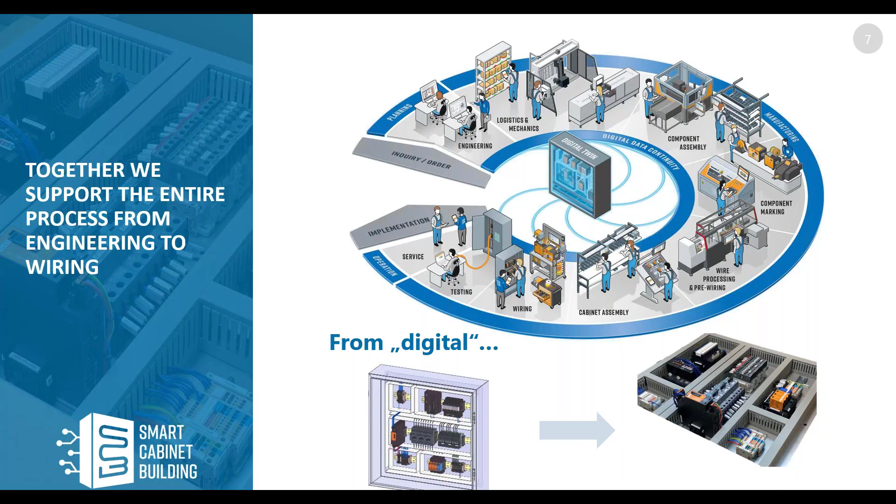Thank you, Christian. So let's talk about the digital twin and the way to get one. As Christian said, we have in the center the digital twin. From the digital twin, we can export all the data needed for these automated and semi-automated processes.

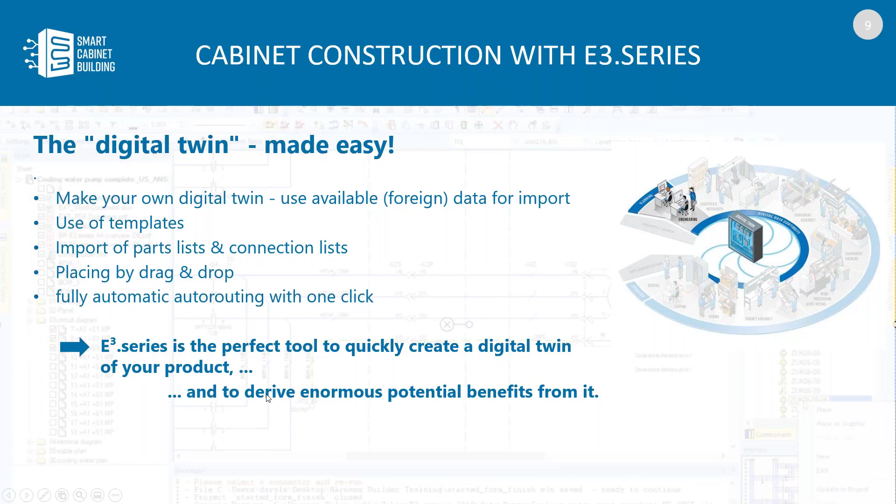But we need a digital twin, and if you are lucky, you get from your engineering department or from your customer a perfect digital twin designed with E3.series. If not, I can show you how to get a digital twin on your own based on a parts list and a connection list. Because if we have this digital twin, then we can derive enormous potential benefits.

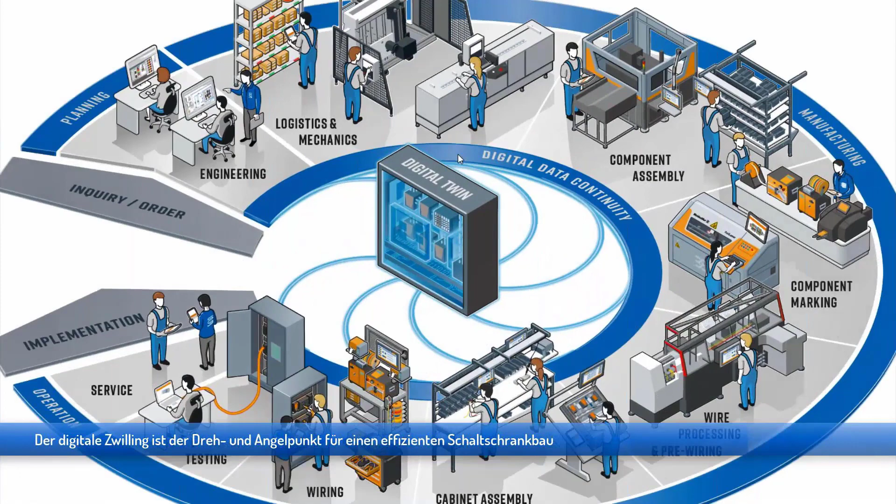So, short video. We can see in the middle, it's all about the digital twin. If you get a perfect digital twin, like in this case, it's ready. Maybe you already have one, then everything is fine.

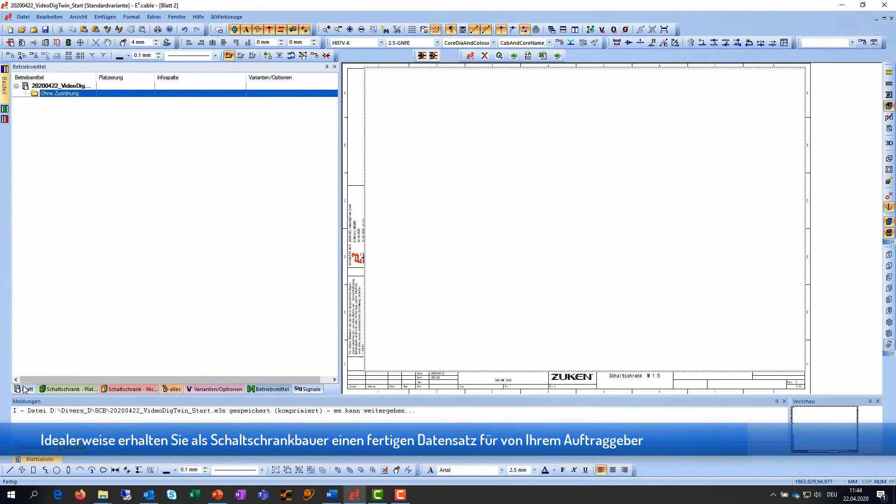If not, and this is now, I have an empty project and an empty sheet, so there's nothing in it, no devices, no wires, nothing. And now I can show you how to come to a digital twin very fast.

We can use, for example, some templates. In this case, I have a template with the mechanical part of the cabinet, so some rails and cable ducts and the housing. And we see that by importing this template, I have some devices and a graphical representation.

And now I import just a parts list.

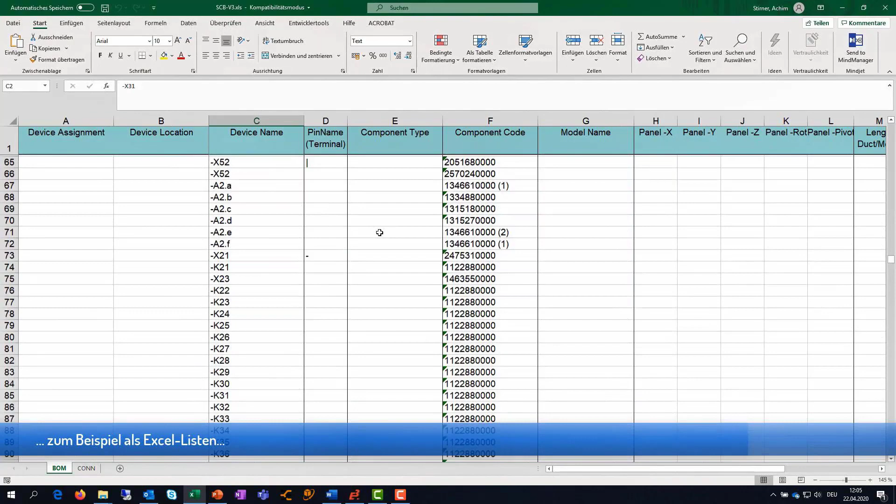It's enough if you have the device name and a component code or article name. In a second step, it would be nice if you have a connection list from the tool list. If there is also the wire color and the cross section, it's much better, but that's not a must.

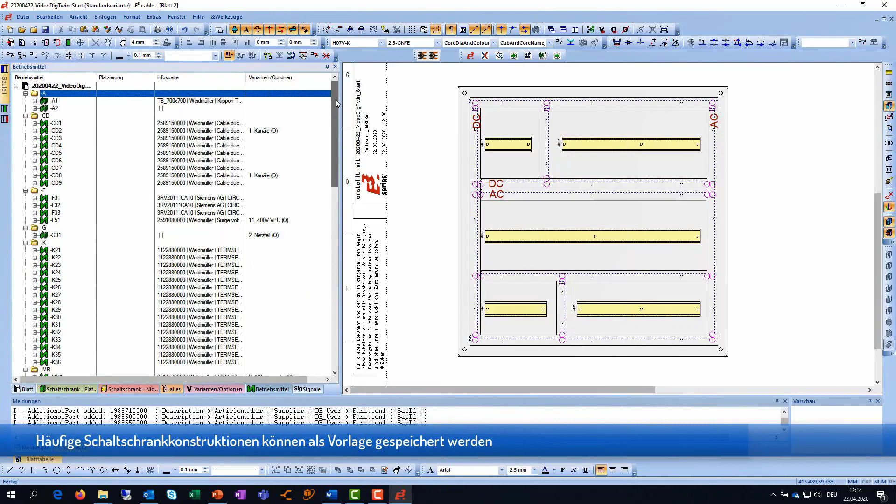So I have imported now this device list and the parts list, so I have more components in my tree, as well as some connection lists, and I can place them very fast.

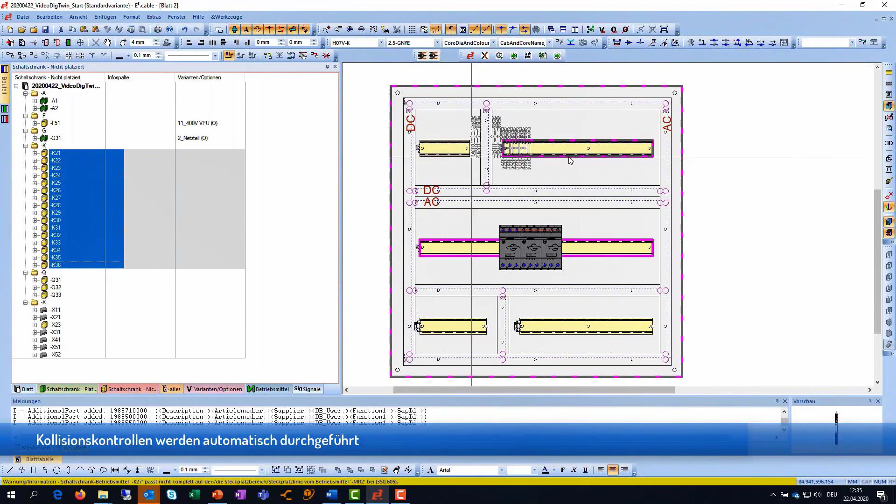With the E3 panel, you can see it's just by selecting the devices in this tree called panel unplaced. All my devices are in who I have in my parts list, but not placed in my cabinet. You can see if I place the terminals and these other devices, then the cabinet gets complete.

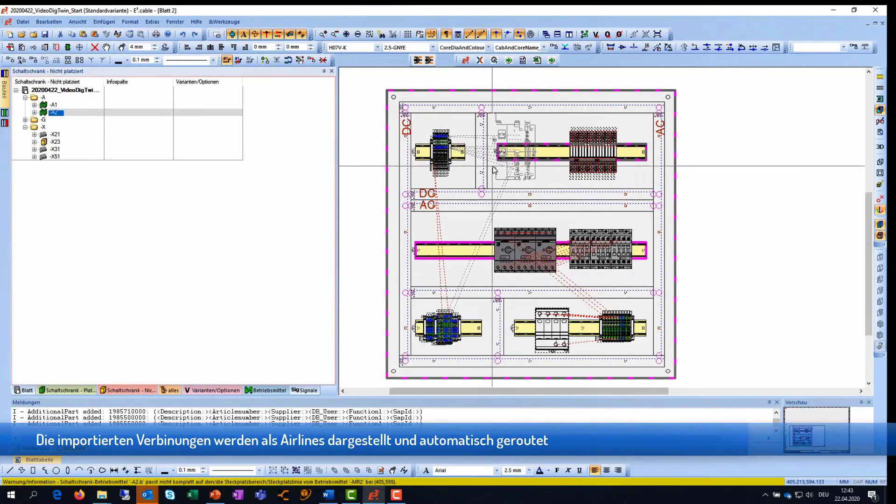And on the left side, my tree has to get empty. Then I know, okay, I have all devices placed. It's possible to place also all the components.

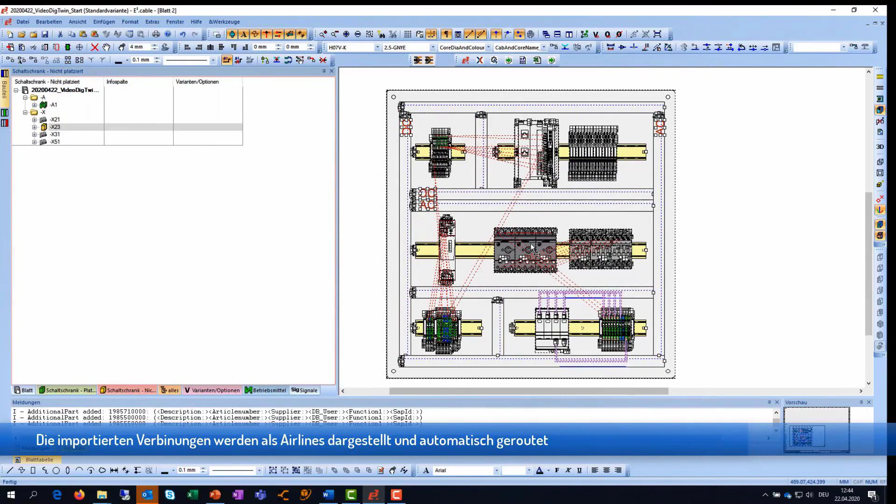The red dotted lines are the logical lines from our imported wire list, and now E3 can do the auto routing for you. If I select all the components and do the auto route, then the complete cabinet is routed, the cable fill duct degree is calculated, and now I have a perfect base to export our cutout information.

We can export data for labeling and marking. We can export the wires. We have source, destination, the length, the wire end marking, so the pin names and so on. So we have all the data.

We don't need any schematics. It's enough to have the parts list and the wire list and place them in E3 panel.

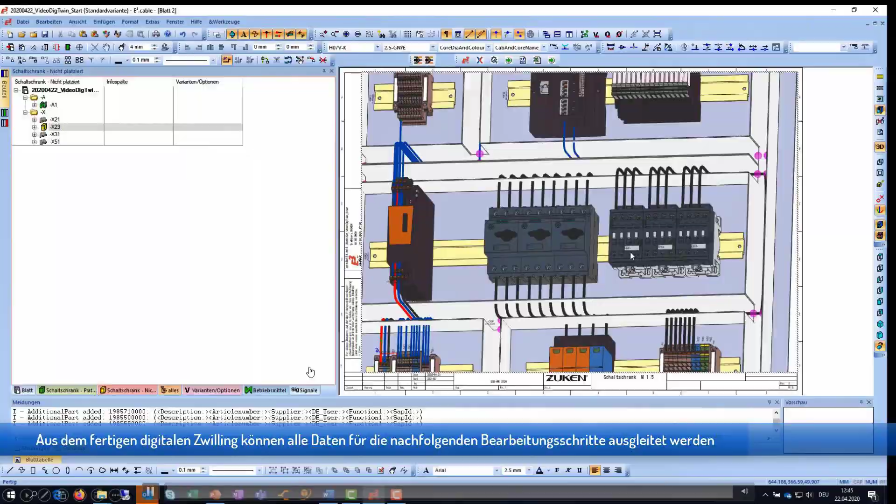And now this is a good base to export all the other data you have in your production. Maybe you have all of them. Oh, sorry.

Next sheet. So it's just from the engineering to create, to get or to create, like I showed, the digital twin. And then from the digital twin, you can export to various automated and semi-automated production machines, whatever you have.

In a perfect way to the machines of the partners of the Smart Cabinet Building Initiative, but there are some more exports to various other machines around the cabinet assembly and cabinet production.

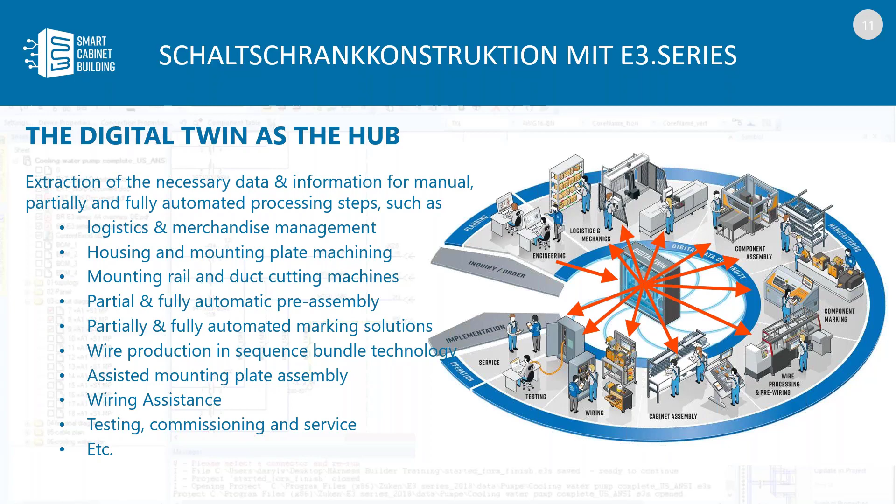And with this, I want to hand over back to Christian.

Thanks, Achim, for showing us the digital world and how we can easily get to all the relevant information inside the digital twin. The next process step I want to have a more detailed analysis is the process step of logistics and component assembly.

There we want to present two different kinds of solutions. First of all, our solution for automated assembly, and after that, Timo Tessin from Armbruster Engineering will give you some insights regarding an assisted terminal rail assembly solution.

Why are we showing both solutions? Because from our point of view, especially this combination of a robot for the high running components and an assisted workplace for the not so common components is a very good way to meet the required variety of variants in an economical way, which really makes sense in the end.

First of all, I want to show you in more detail the assembly robot, and therefore I would like to show you another video.

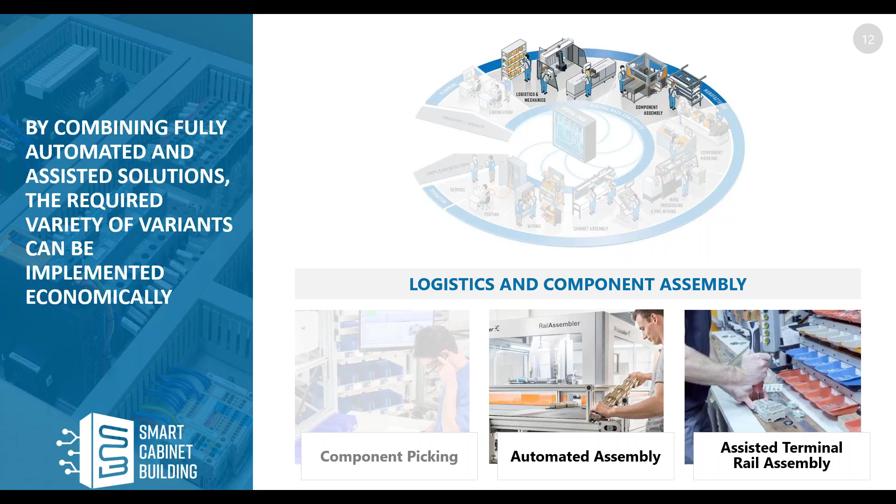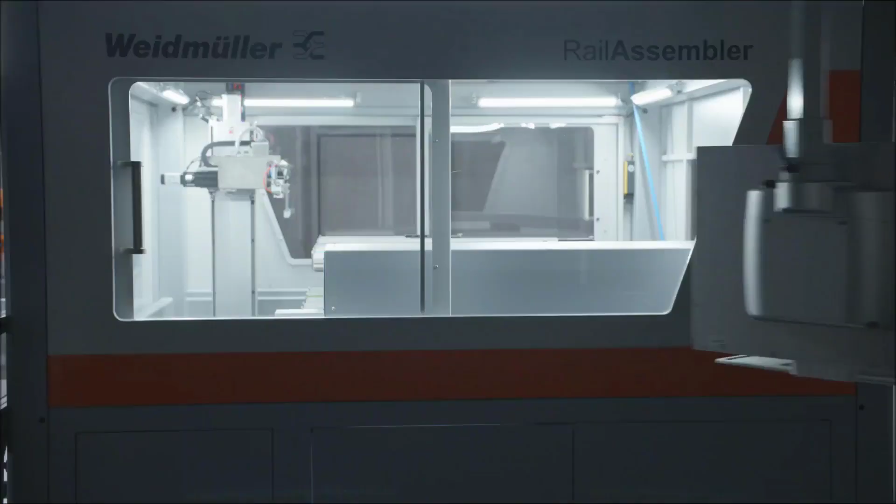Inside this video, we can see now our Klippon automated RailAssembler, the answer of Weidmuller for the task of having an automated assembly of terminals on rail.

The machine has overall 40 magazines for different terminals, and these magazines have a very universal design, which is also optimized regarding some handling points.

You could see in this video that for sure they are very easy, but based on this simplicity, we have really a universal solution in the end.

During the filling process, we have several booking steps to have in each process step the right transparency. The machine is steered and controlled by the information of the Weidmuller configurator.

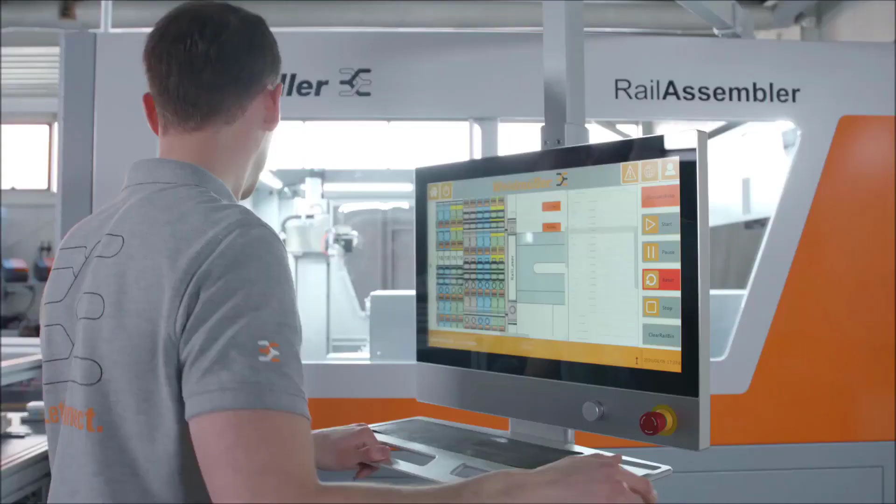And this Weidmuller configurator is also an automated interface to Zuken E3. We have 18 magazine places for pre-cut DIN rails.

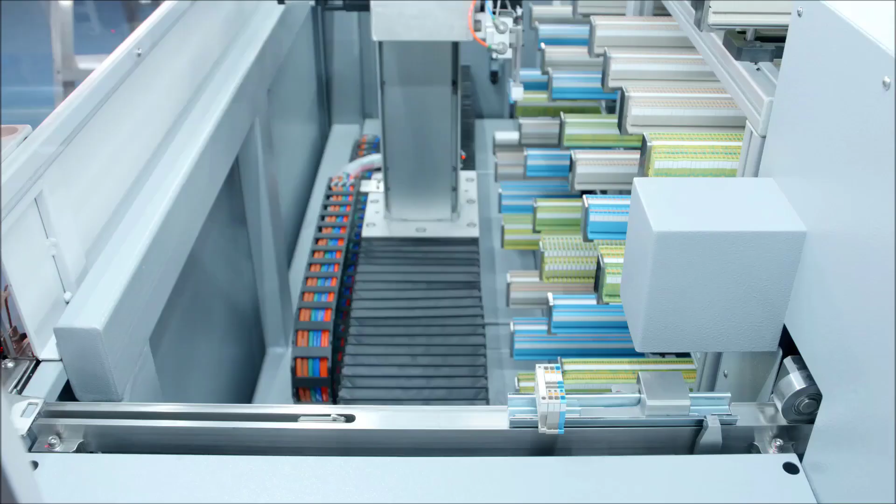Another really advantage of our solution is that we have a special kind of gripper, which consists of several slices, and based on the slices, we can even handle more complex contours of terminals as well.

You can see in the video that we are using terminals that already have blank markers on them. Our Klippon Connect A-Series is a DL version, because from our point of view the best combination is having the rail assembler for the assembly of components and later using a rail laser for the fully automated marking.

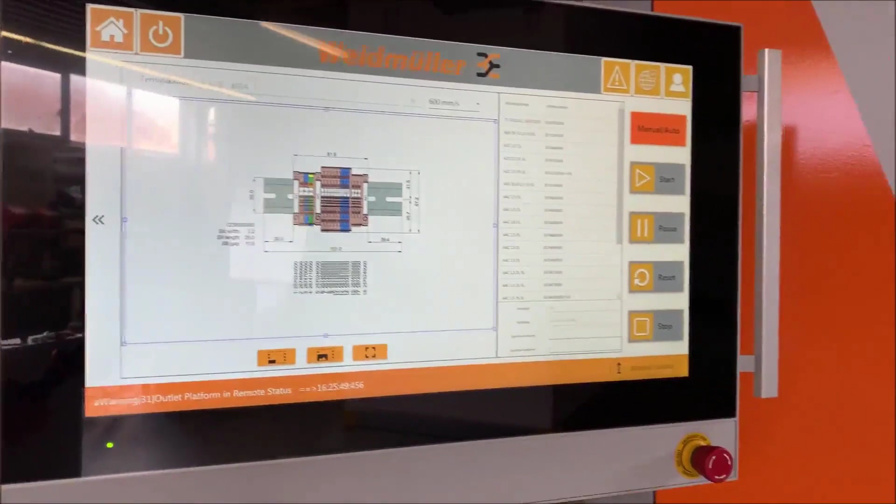But we don't want to show you only a nice image video. We want to show that this machine is really operating day by day. So we took a video yesterday afternoon with a mobile phone, no professional video.

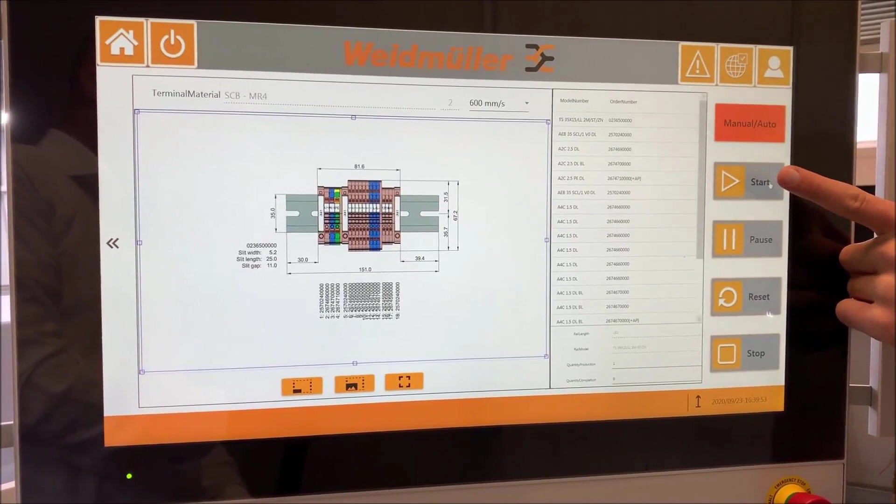You saw on the screen of the machine that we are producing exactly this DIN rail which Achim designed at the beginning. We saw the 40 magazines where we put on the right components, and after that we just press the start button. Then the machine starts the production process, terminal by terminal assembled on the rail.

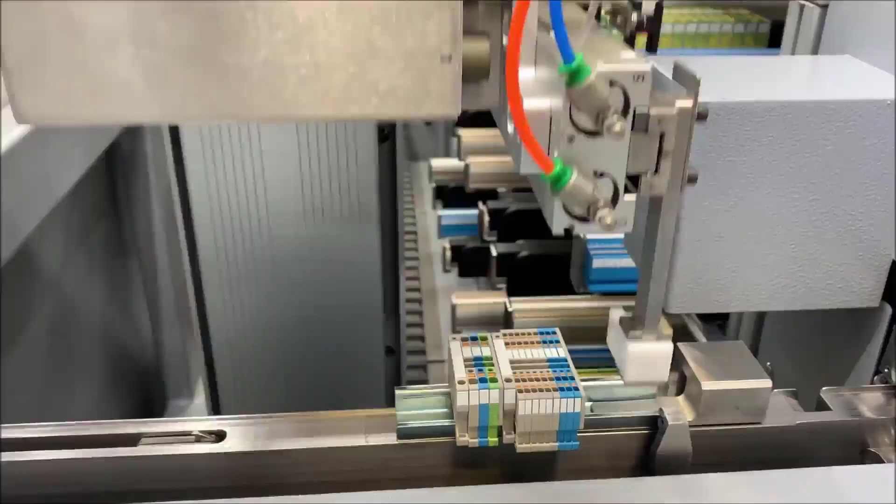Again, all the required information comes without any manual interaction directly out of the digital twin that we designed at the beginning of our process step. The robot puts all the components on the rail. We are nearly at the final stage, and then the terminal rail is put out of the machine. That was one DIN rail.

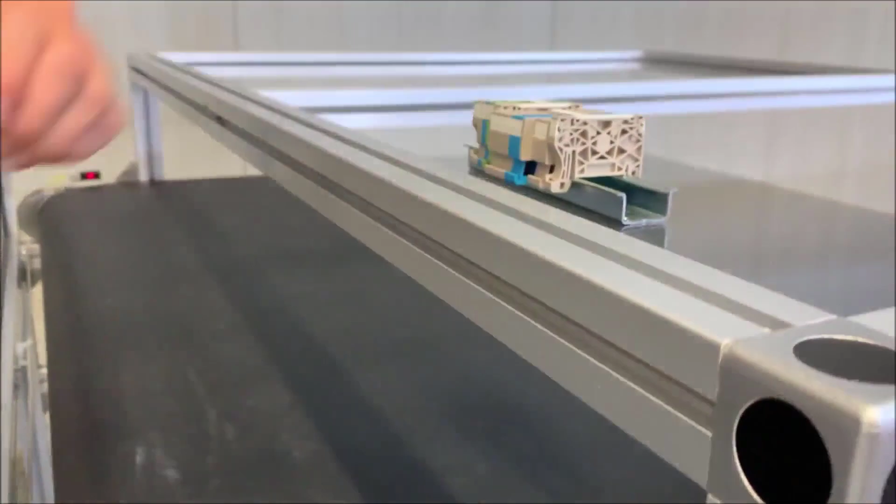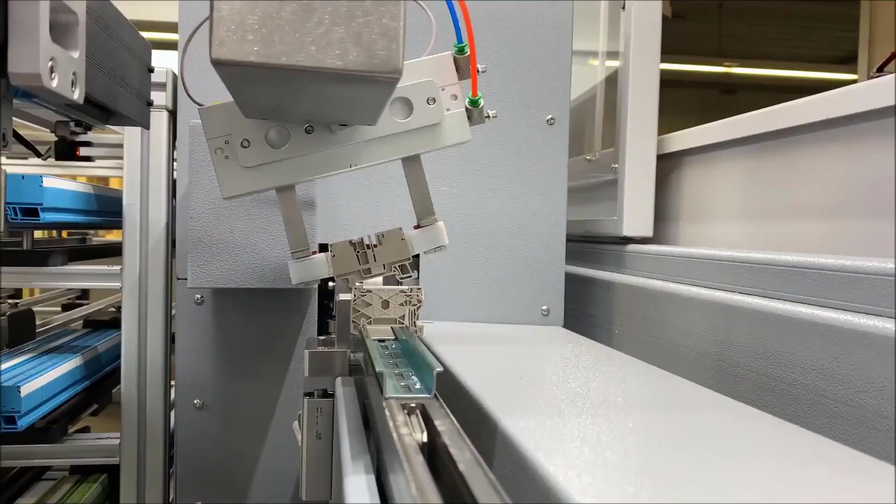I want to show you a second example, also from the digital twin we designed at the beginning. In this DIN rail, which you saw on the screen, we have a special setup where only the robot puts the high runner components on the rail. You can see that there's a huge gap on the rail at the beginning. In that area are special components that we will later place with the Armbruster solutions - for example, components that are not so common in use, or components that can't be handled by a robot, such as ones that have to be screwed onto a DIN rail.

Honestly, this combination makes sense from our point of view, and is a good answer to have a smart, robust and economical solution to meet the required variety of variants. In the video you can also see this special kind of gripper with several slices, so we have really robust handling of the different terminals on the rail. And now we put the rail out again.

And now we will come to the process step of assisted assembly, and therefore I would like to hand over again to Timo Tessin from Armbruster Engineering. Thank you very much, Christian.

Now we will show the assisted terminal rail assembly with ELAM, our software. So practically it's 3 parts. We have the component assembly that we support with our ELAM software via projected working instructions, meaning we show the positions of the terminals on the workplace.

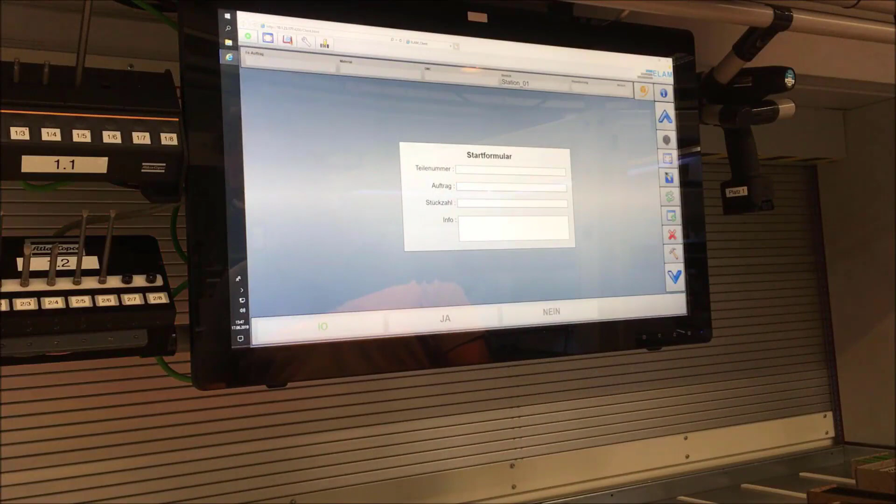Every working instruction you see here is dynamically generated, so nothing is pre-built. Everything comes from the export data that we are receiving. Here we can see that the work instruction is generated and shows where you have to assemble the rail. We also support with automatic screwdrivers, so we can give the worker the exact amount of screws he has to assemble.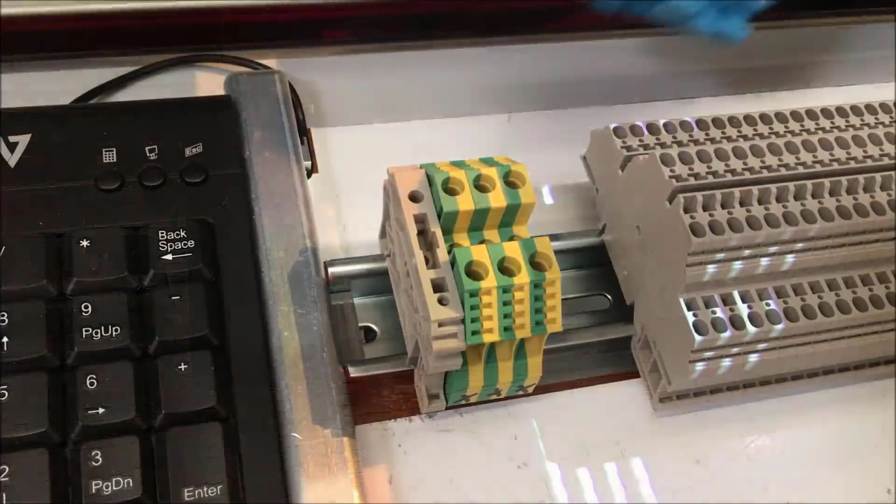The worker will assemble the complete rail here with all the missing parts that were not yet assembled. The next part is the markers. Here we also show the worker where he has to put the markers and that he has to print them. You can see by the projected working instruction that the worker sees exactly where he has to put the markers.

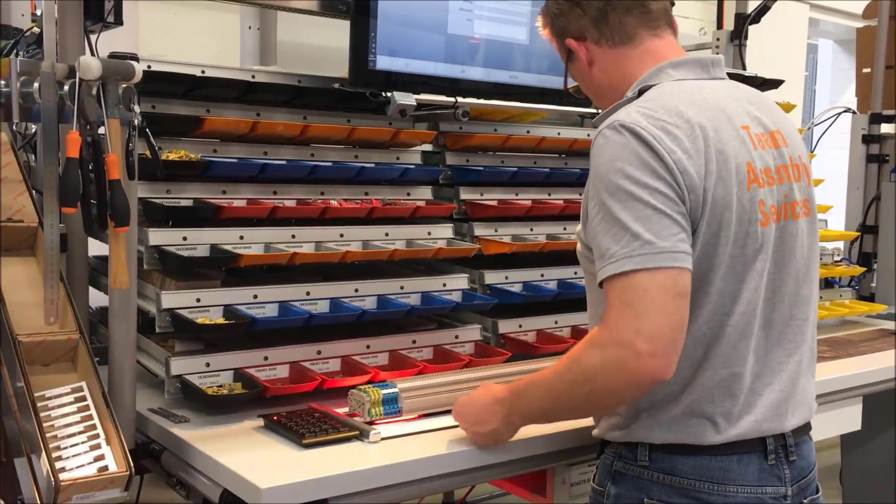And in the next and last step are the accessories. Here the system is supported by the pick-to-light system. He can pick the connectors from the pick-to-light system, and also has to screw them again.

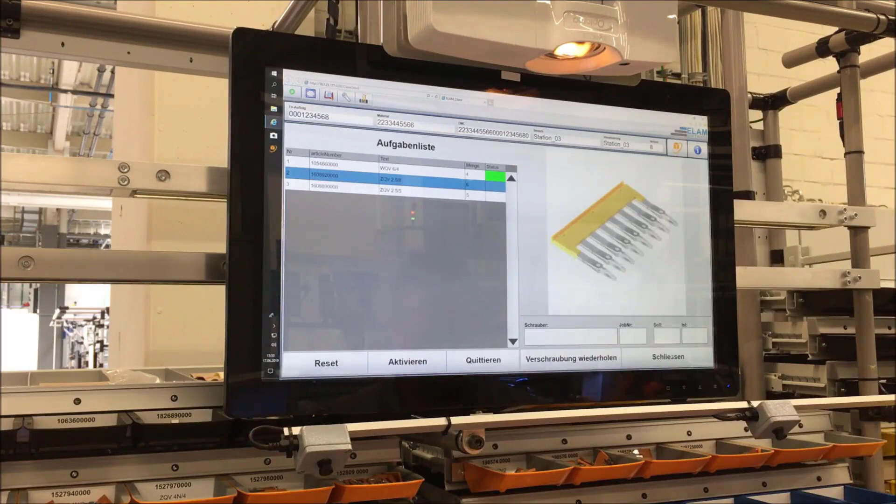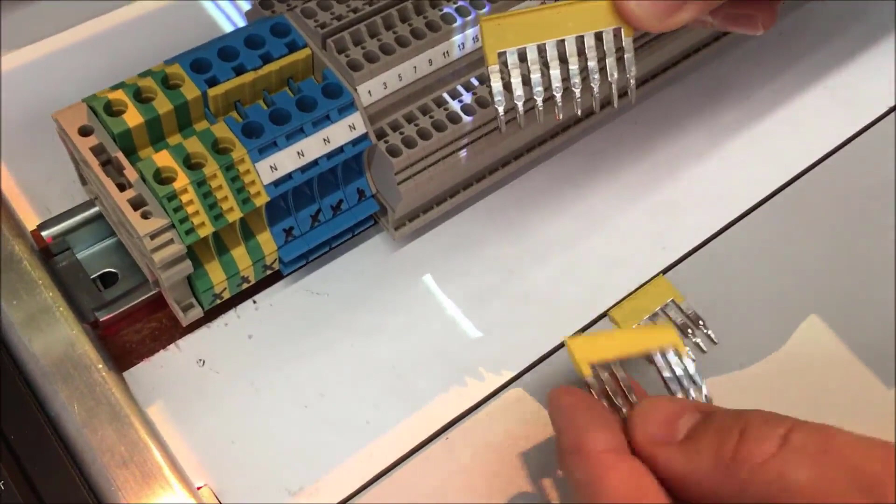Everything is documented here. And we also show the worker via the projection how the connectors should look like. You can see it here. This one would not fit, but this one would fit. So you know how the connector has to look for your assembly.

And at last the documentation, where we take a picture of the assembled rail, terminal rail. Yeah, that's about that.

We also have our small video from the last fair in Czech, I think that was, that we can watch here. So this is the same as before, but just compressed into one small case. But it's practically the same.

We are seeing the dynamically generated work instructions. We have our pick-by-light system that's supporting the worker, and we are also projecting the work instructions right on the workplace, also supported by the electronic screwdrivers. And step by step, we can go through the assembly.

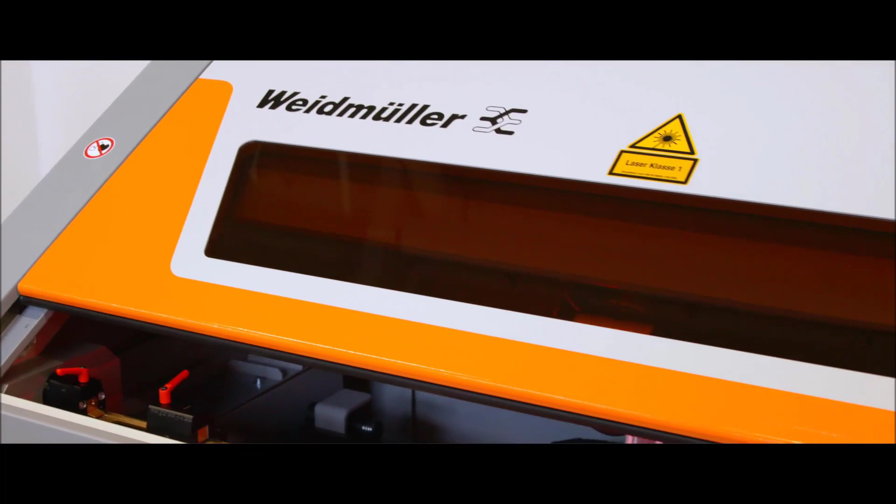So also here at the beginning, I'd like to highlight the rail laser itself, a machine which can handle DIN rails with a length of 100 up to 1,200 millimeters and 15 kilograms. We presented this solution during the SPS fair roughly one year ago, and we implemented such machines also during September last year in our own production.

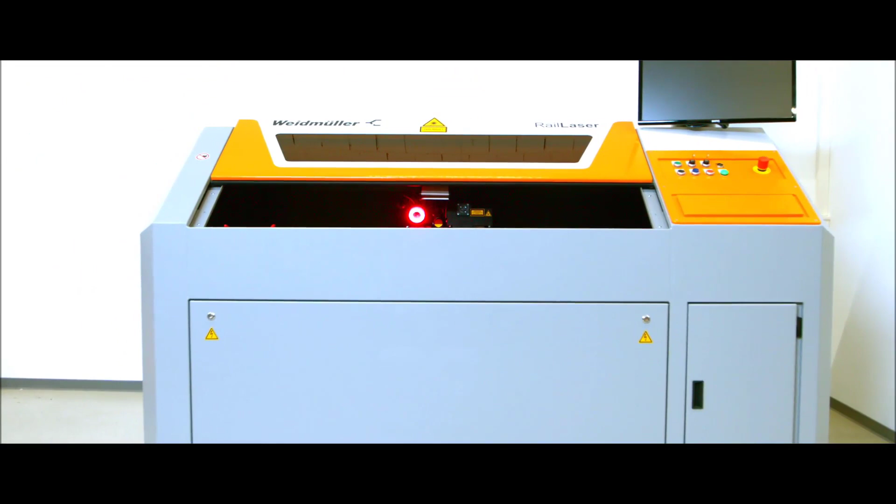Because based on this solution, you can really have huge time efficiency increases up to 90%, depending on the length and complexity of the DIN rail.

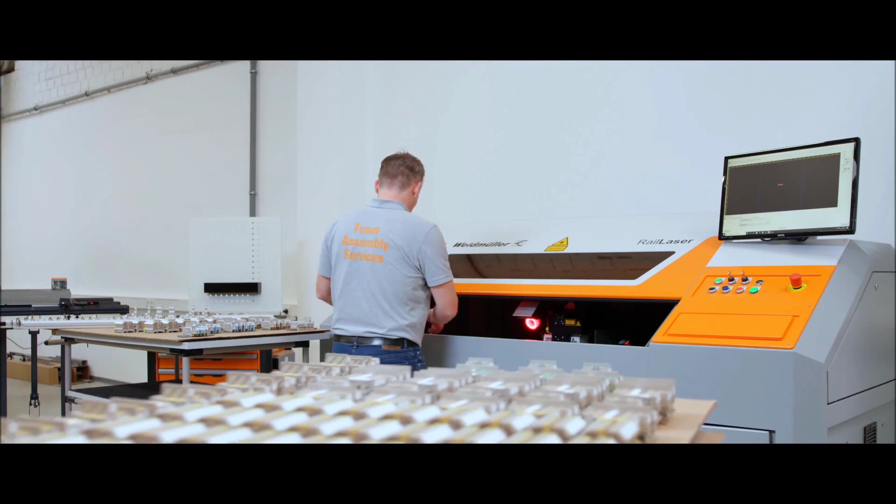So again, everything is steered and controlled by information from the Weidmüller configurator, which has, as a short reminder, an interface to Zuken E3, and we are using exactly the information that Achim designed at the beginning. If we use the so-called A-series DL with blank markers on it, the operator only has to put the rail inside and press the start button.

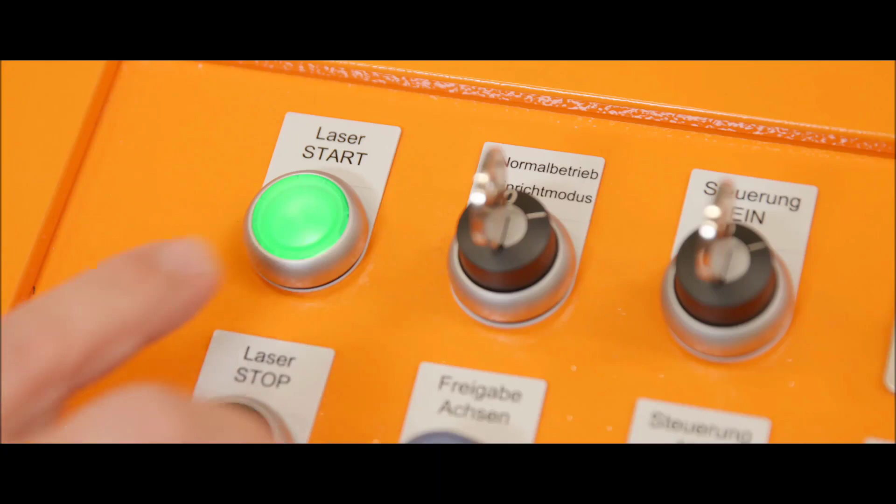You see here on the screen that this solution is very universal and flexible. So our idea in this use case is the high-runner components are assembled with the rail assembler, the other components with the assisted workplace, and then the fully equipped DIN rail goes in the end into the rail laser, because the rail laser can also take care of components with a very complex contour, for example, or components that have to be screwed onto the DIN rail.

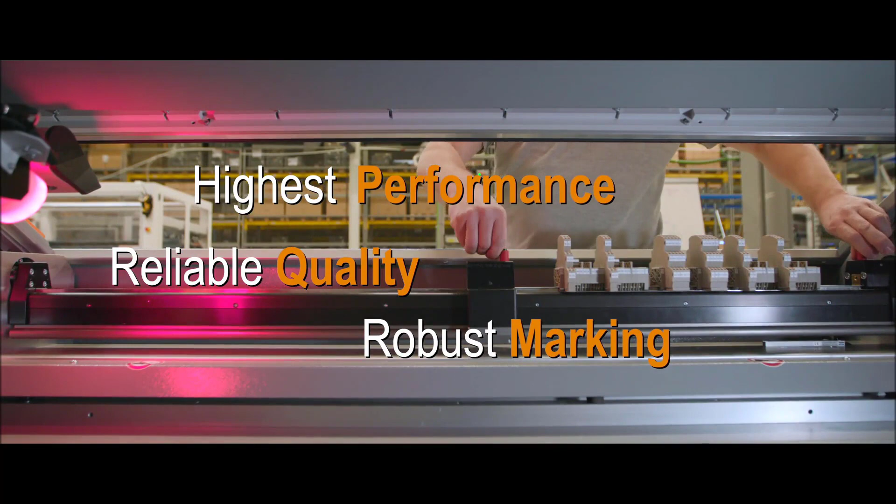A unique aspect is the image processing inside our machine, but I'll give you more details on that later. So also for the rail laser, we showed that this machine works nicely, but also for this machine we want to show you that it's real life. We took some videos with our mobile yesterday to show you that it's really working.

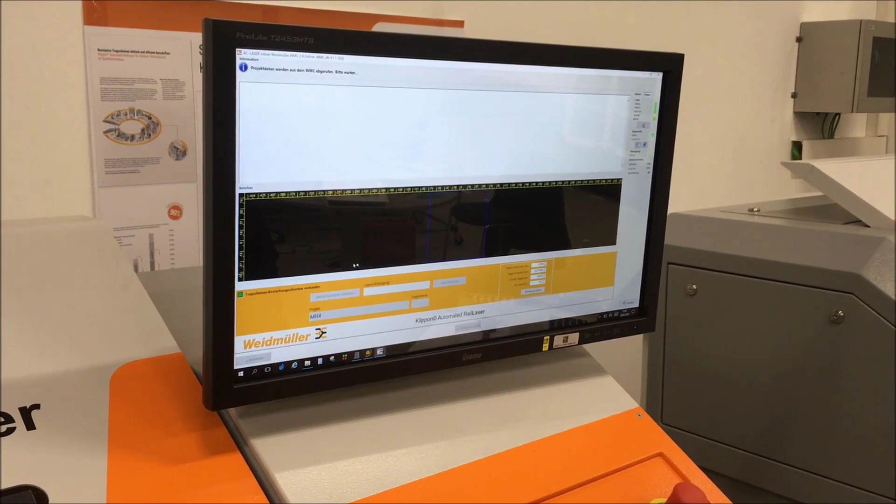So again, we are using the file from the Weidmüller configurator, reloading the file. You might remember this DIN rail from the beginning where Achim showed us this DIN rail already. And now at the rail laser, the operator only has to put the DIN rail inside. For example, these cross connectors were also assembled by a projection at the assisted workplace.

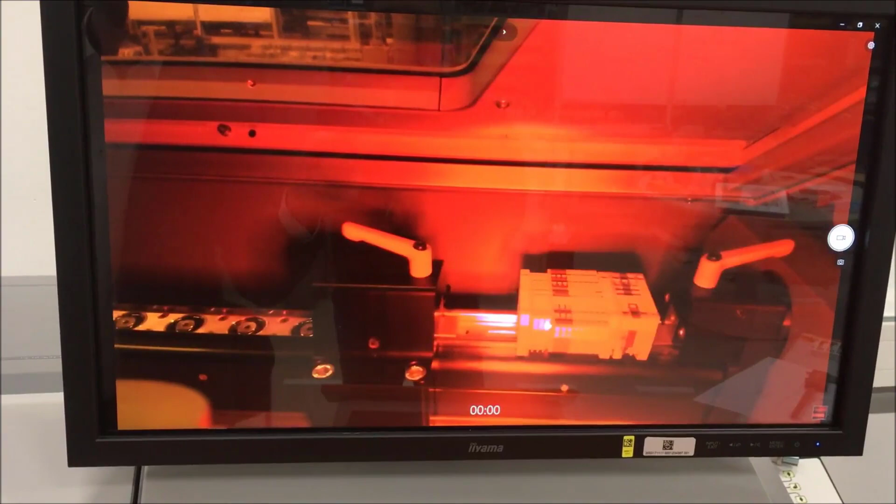Press the start button, and then the image processing takes care of each marker. So we are checking from several sides the position of each marker on the terminal, comparing this position with the position in the digital twin, and we do fully automated adjustment to make sure that we mark directly in the middle of each marker.

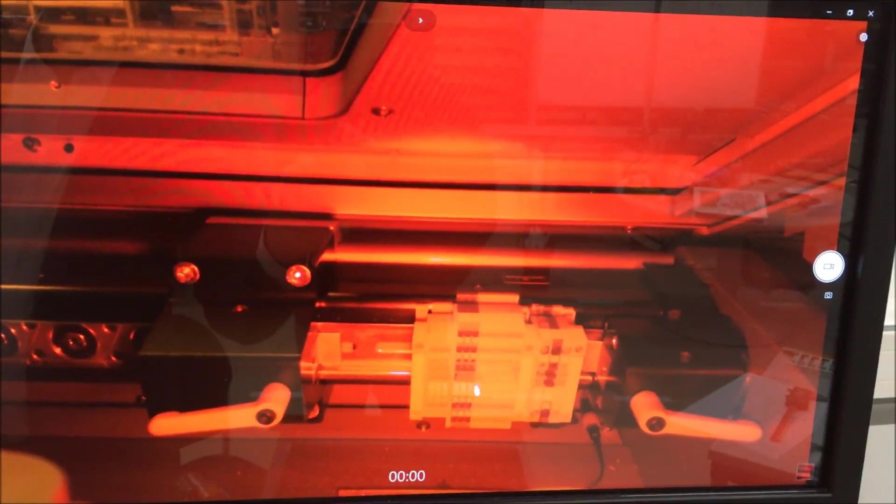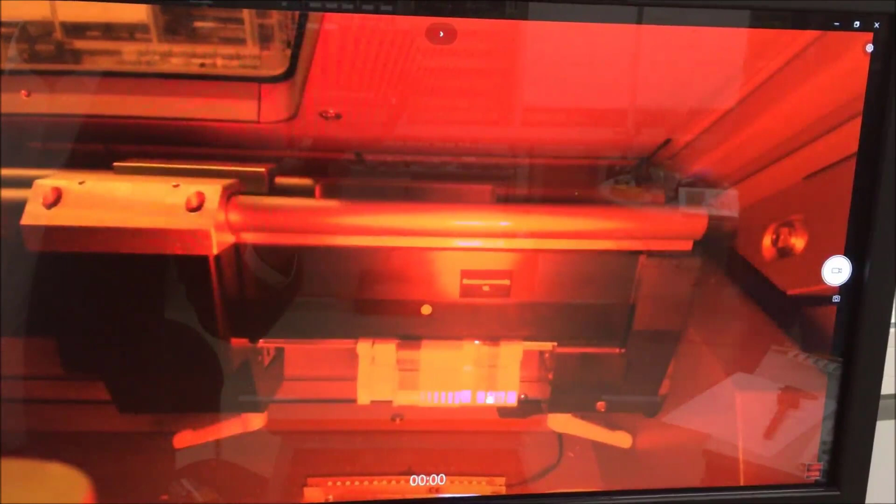And you can see in the video that it's a really high-speed marking process, high accuracy, high speed, and also a very good result in the end with the final marked DIN rail. So just the final side, and then the machine will open and we can see the marking result.

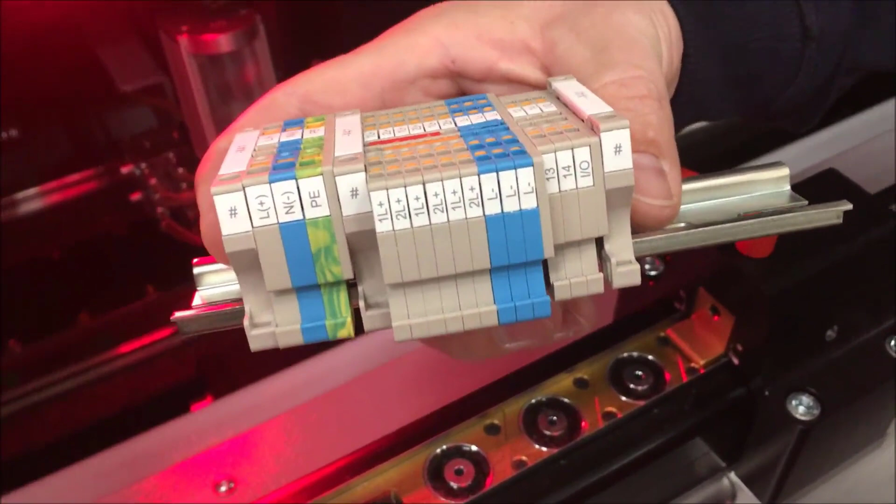We have also very good sharpness for these markers, this marking process, and based on our laser source, we can use our standard marking material, so no special markers are required. That was the first DIN rail.

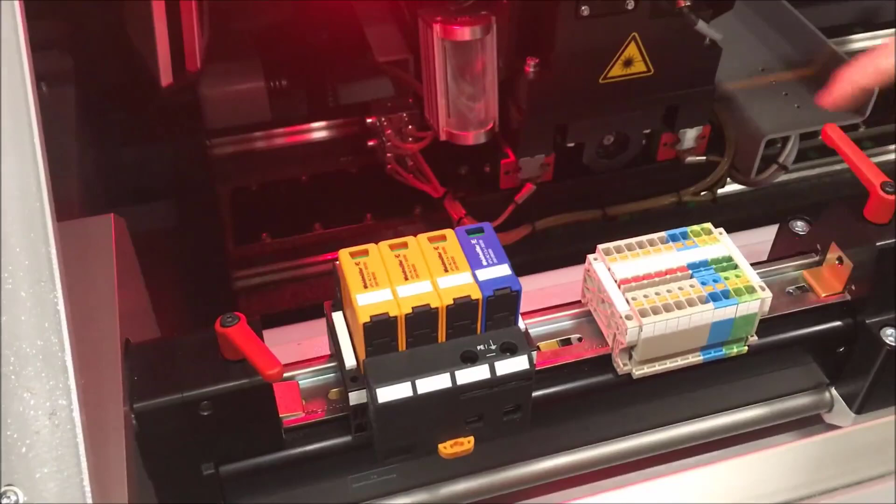We have also a second one. If you remember from the video, the rail assembler takes care of the terminals on the right-hand side. Over voltage protection comes from the assisted workplace, where we add this kind of component.

Also this DIN rail we just put inside the machine, we fix it, press the start button, scan the DIN rail from several sides again, and then the marking process takes place. You can see that we are able with our solutions to mark not only terminals, but also some bigger electrical components. DIN rail components are possible to be marked with our solution.

Here you can see the result. So also there we have all the markers marked as required. And after the marking process, for sure the wire processing follows, and therefore I would like to give the word to Tillmann Hoss from Komax.

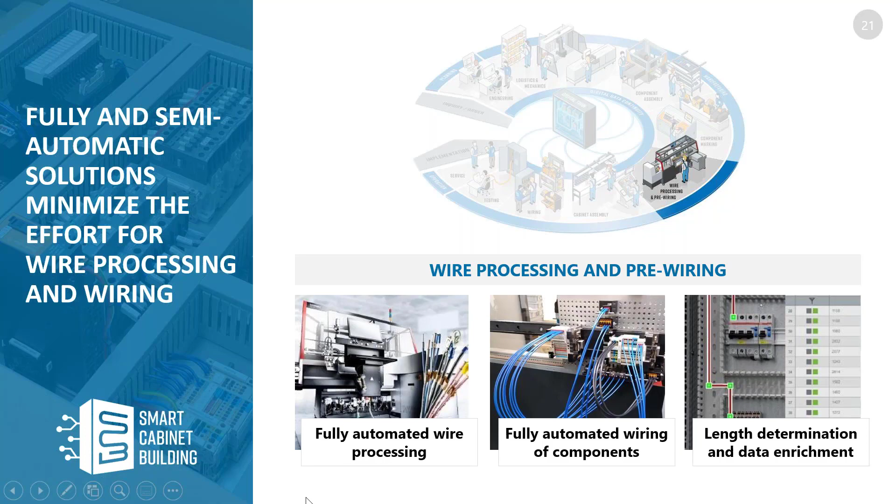A quick theoretical excursion in the beginning. Why is it so important to have one data source that you can use for all your process steps? This is very instructive. Often you see a manufacturing setup like this, so each process is in a sequential row. You have to hand over your work piece from step to step, and very often it's also done just by one person who is bound to this one project.

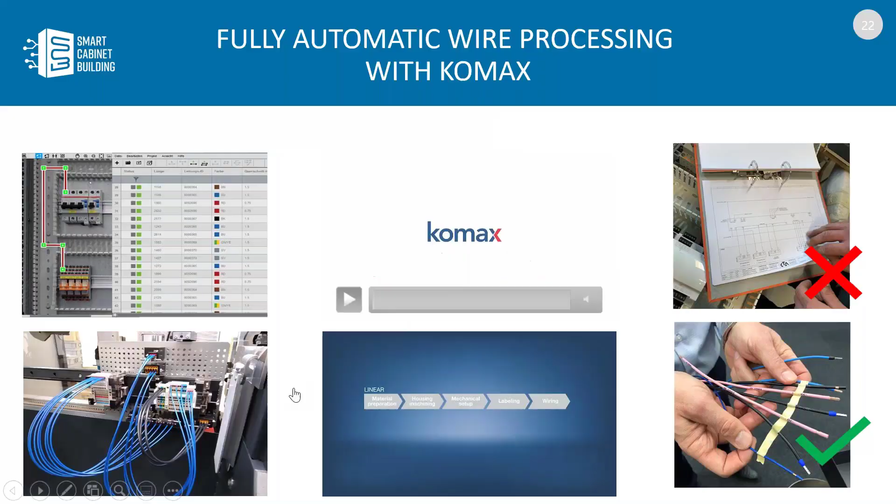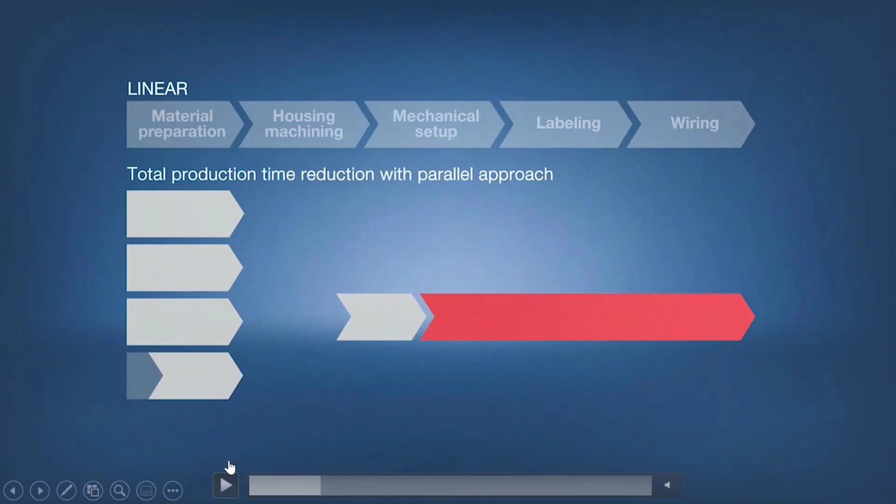Now you can optimize each process step, which will help you save time. But the big gain is when you start to execute those process steps in parallel, when you are able to break up your process chain into individual steps that can start simultaneously, because they are all drawing their information from one source of information.

And this then really gives you an advantage of up to a 65% reduction of lead time. So when all information is available, you can already assemble your terminal blocks, you can cut your wire ducts, you can start assembling all your components, and in parallel you produce the wire sets. The fully automatic production of wire sets saves you 50% time, even if you have to enrich your data.

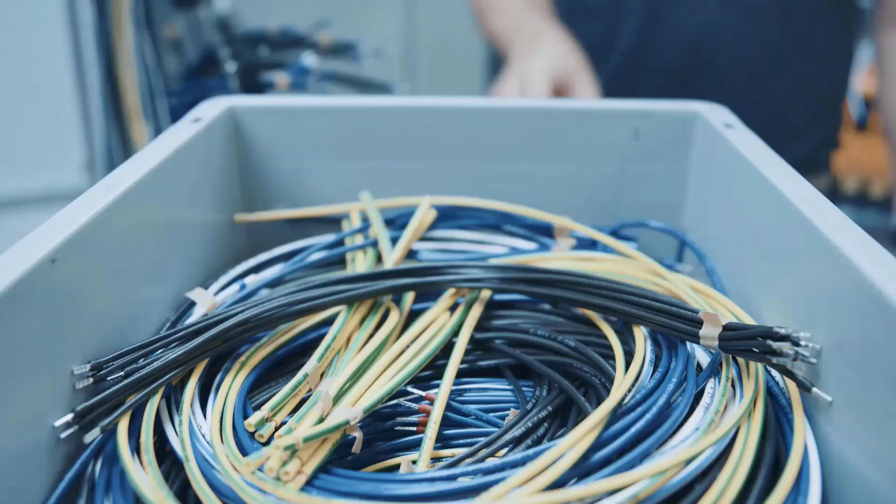And then when you get your wire sets nicely bundled by functional groups, for example, they're all marked with target and source information, so just a trained operator can easily wire up your harness, your control cabinet without making failures. This saves you up to 80% of wiring time. So that's something that everybody wants to have.

But the precondition is to have a machine readable connection list. In the ideal world, like Achim Stirner from Zuken showed, you make your engineering in 3D, you can derive all your data from there and export it very nicely to all the subsequent process steps. Very often we see that, unfortunately, this is not the case, because the engineering does not take care that all production relevant data really comes with the digital twin.

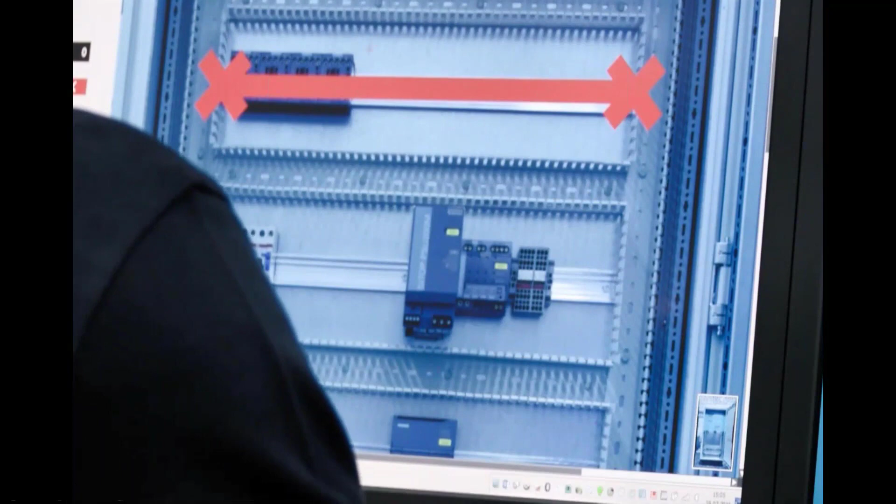So Komax has created here a small tool where you can take a photo of your control cabinet. This control cabinet is calibrated, so you have the dimensions. And then you pick your connections from your connection list, and you can quickly draw the connection on your PC screen. The skilled worker is very, very quick on this, and you also have some rules behind it.

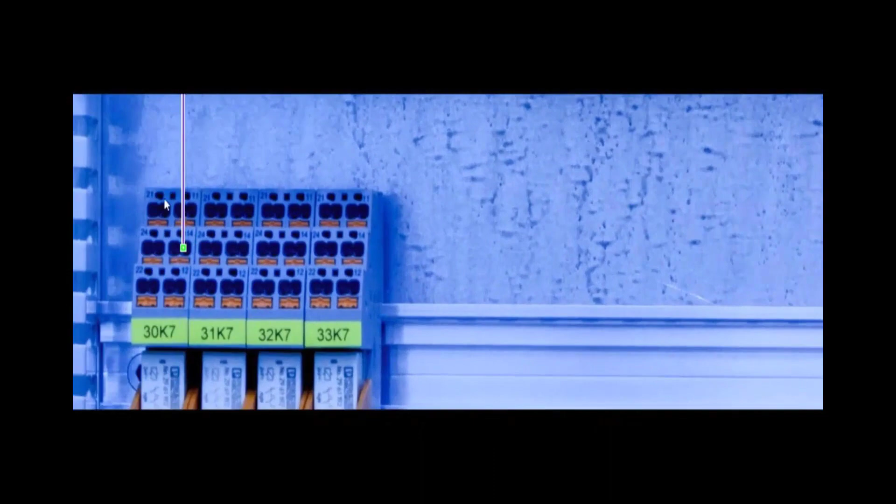For example, only the signal lines go on the left side and the power lines go on the right side. And you see here in this connection list that the length has been added. You can also add missing data, like the connection type - is it a ferrule or a ring lug?

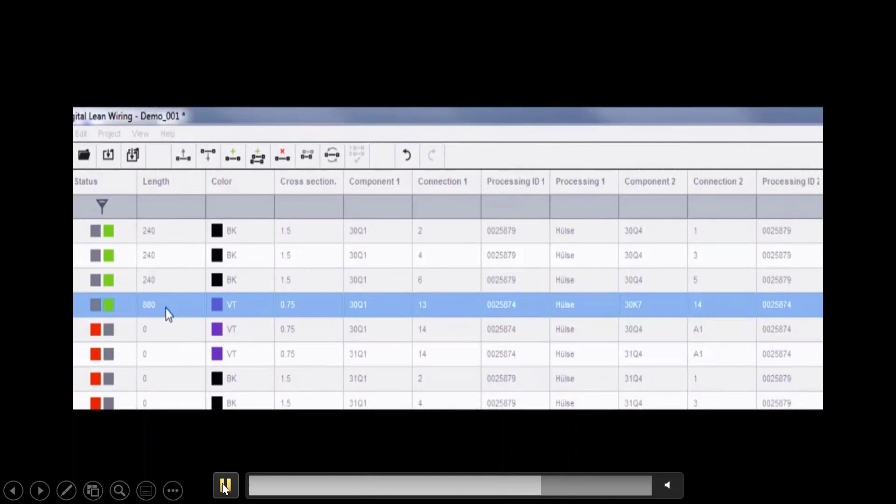Or you can add the color and dimension of the wire, and you can treat batches of wire at the same time. So you can very quickly enrich your data and then be ready to send it to the machine, to the Zeta machine, and get it produced for you.

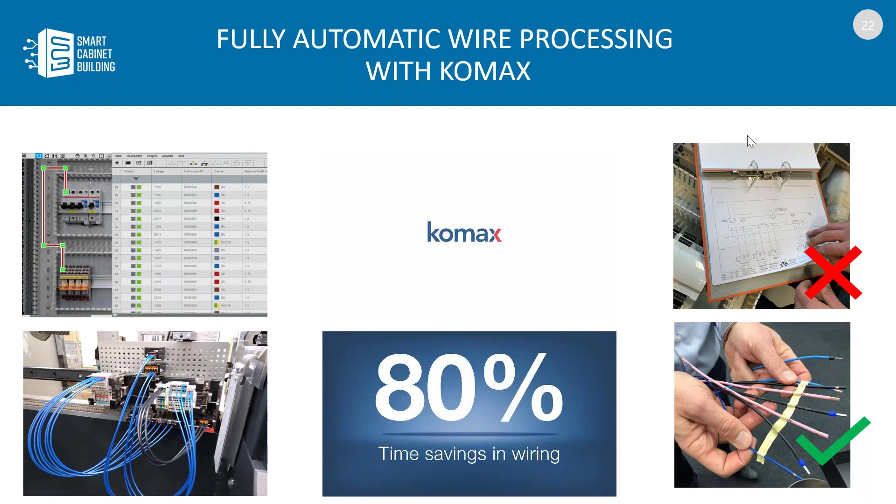It will give you the bundles in a way that's easiest to wire up your control cabinet. This is actually state of the art - many companies are doing this or moving towards it. In our use case, we want to demonstrate more, and for this I'll start a video.

Quick remark - we have seen that the engineering was done in 3D. From there we could configure the terminal rails. The terminal rails were produced fully automatic on the rail assembler, marked on the laser marker, and now we get them on the machine, where we can wire them up fully automatic.

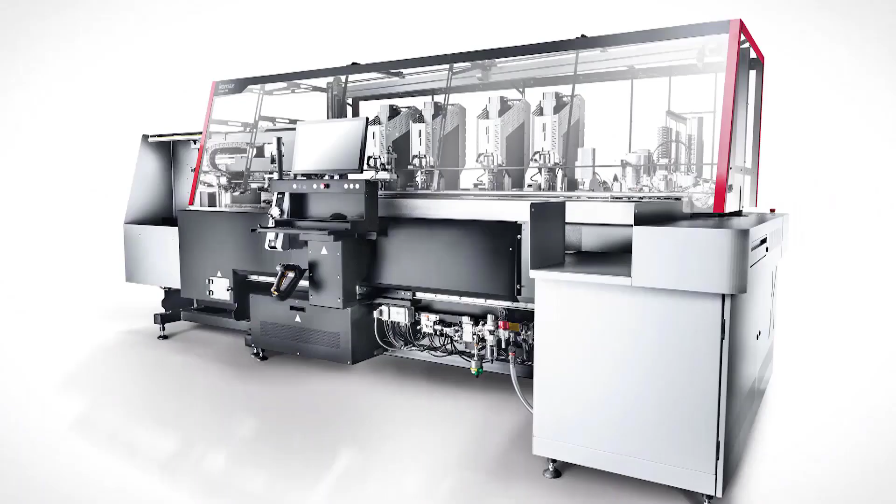Sorry, now my voice is back.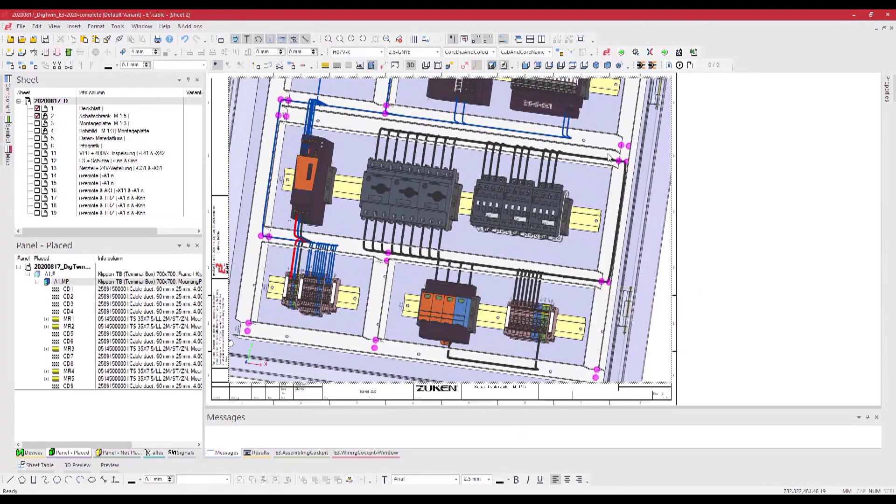As I mentioned, it is engineered in 3D. We get all the information for the terminal blocks and transfer the data to the machine, so there's no programming done on the machine. Here we have the wire processing - 36 different wires on the machine, cutting to length, printing target and source information on each wire.

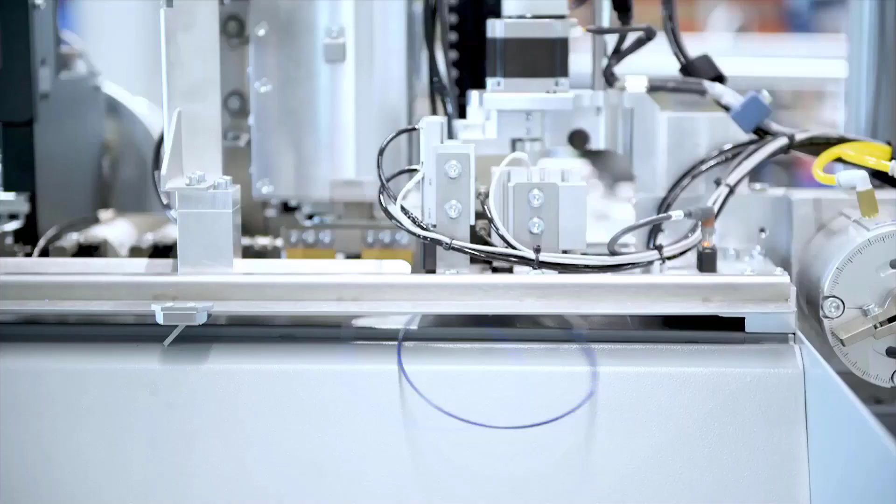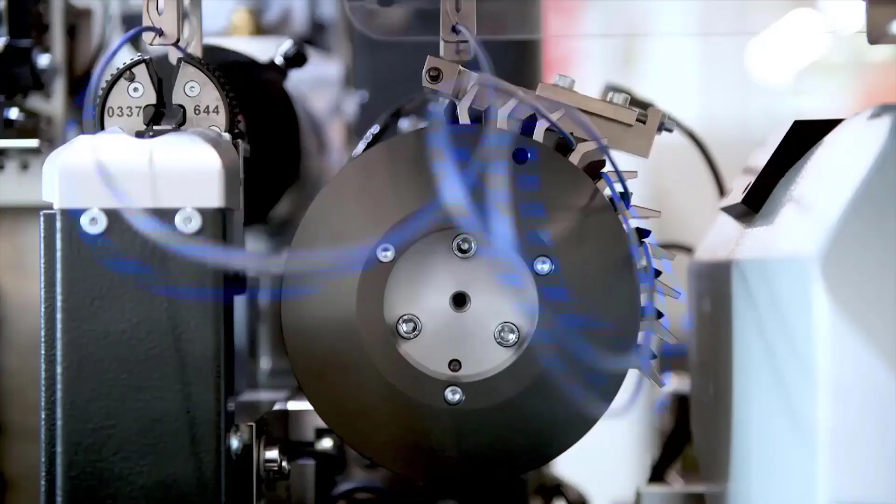Then we have on the machine different wire end processing possibilities. In this case we show the ferrules - we can apply different ferrule types on the machine, and here we can produce a mixed sequence.

Here it gets really interesting. That's the part where the wires are sorted in sequence, how we want to do the wiring up of the components.

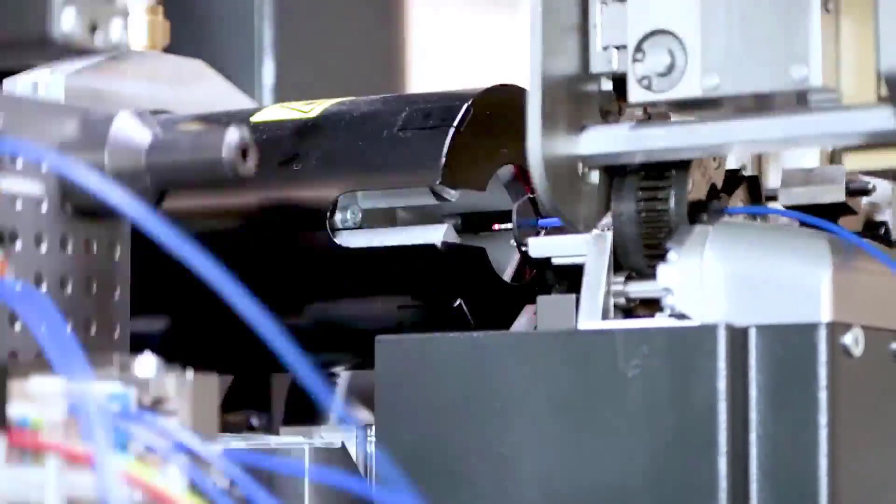The interface. I saw I was muted - I hope you could hear my last comments.

So, fully automatic wiring up of those components. And this is also possible for small lot sizes because there's no programming done on the machine.

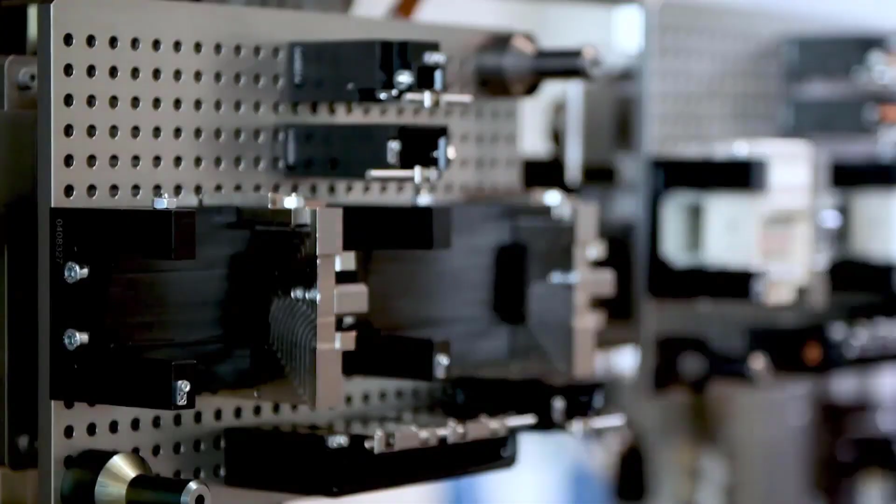This is, in our view, a very efficient way to take the next step in automation. Many people still hope for a robot that does it fully automatic directly on the panel, but we see there are a lot of hurdles to overcome. Maybe in the future it's possible, but here we show a way it can be done today.

And all those components that cannot be assembled or wired up on the machine can very easily be done on an assisted workplace, like we see from Armbruster, where you get software instructions on how to do the job.

Okay, this was the part of wire processing, and with this I would like to hand over to the final steps of control panel manufacturing.

So then I will continue with a small introduction for the next step - it's the assisted mounting plate assembly.

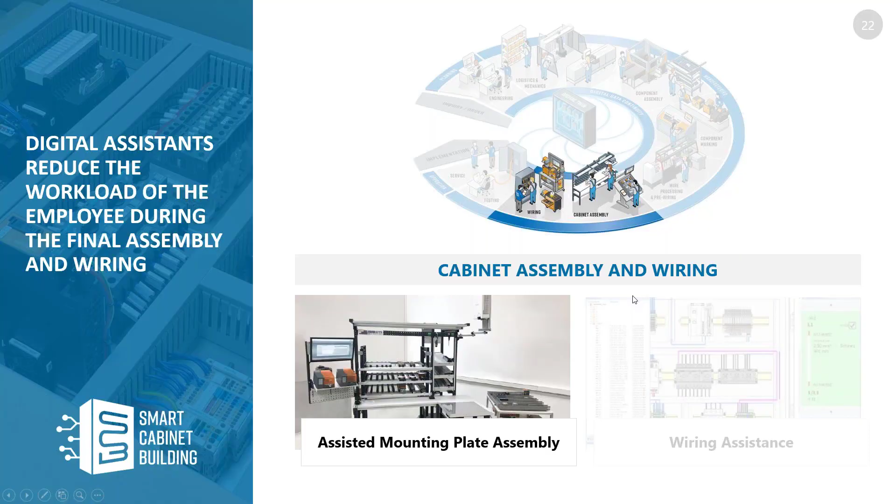So if we have our digital twin, it is possible to export the necessary data for the ELAM system to create the assisted information. We know all the components needed, and we also know the sequence in which they should be mounted on each other. So this is also only one click for the user - I can show this in a small video.

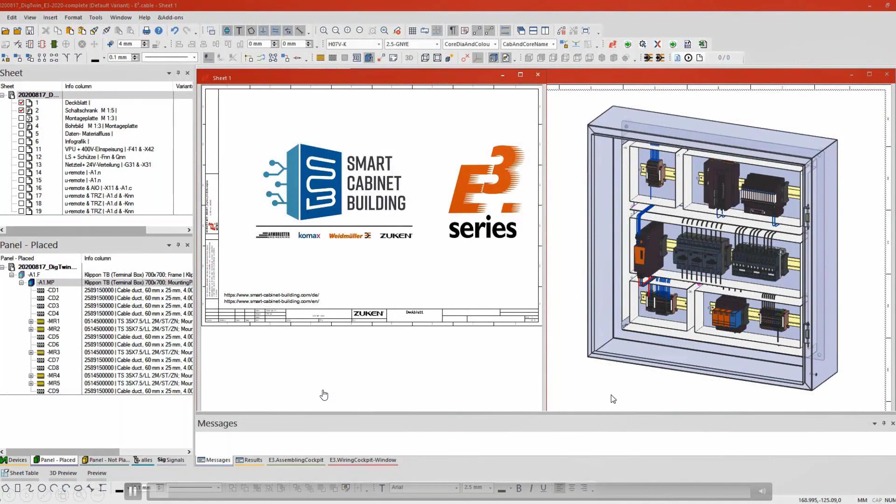As you see, it's our digital twin - exactly the example with the rails we produced on the various machines. E3 knows which component is mounted on which other component, so this is a hierarchy, as you can see in the tree on the left side.

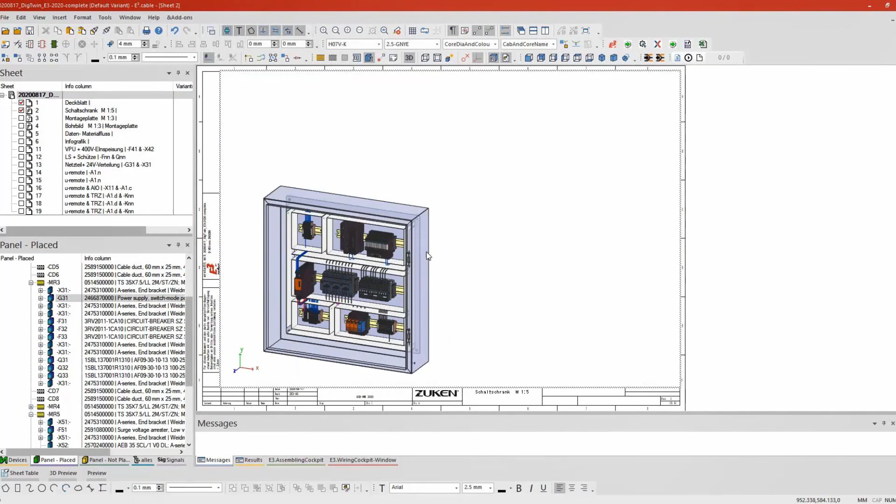For example, here the power supply is placed on mounting rail number 3, and it's very easy - I just click my mounting plate, in this case the mounting plate, and then press a button to export to ELAM. Now all data for this mounting plate are collected and sorted intelligently, with the position, naming, component code, and some additional information like descriptions or hyperlinks to other documents.

So this is all done in a useful sequence, and with exporting this XML file, I hand over to Timo, who will show you how this XML file gets imported into ELAM. Thank you very much, Achim.

Now we are looking at this case in real life again. We have the finished exported data from the Zuken software, and we will import that into the ELAM system. And here we have a short movie.

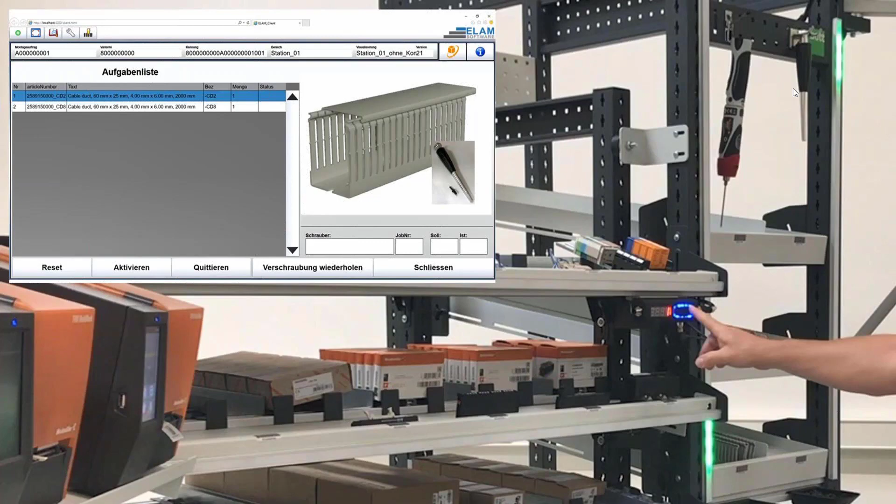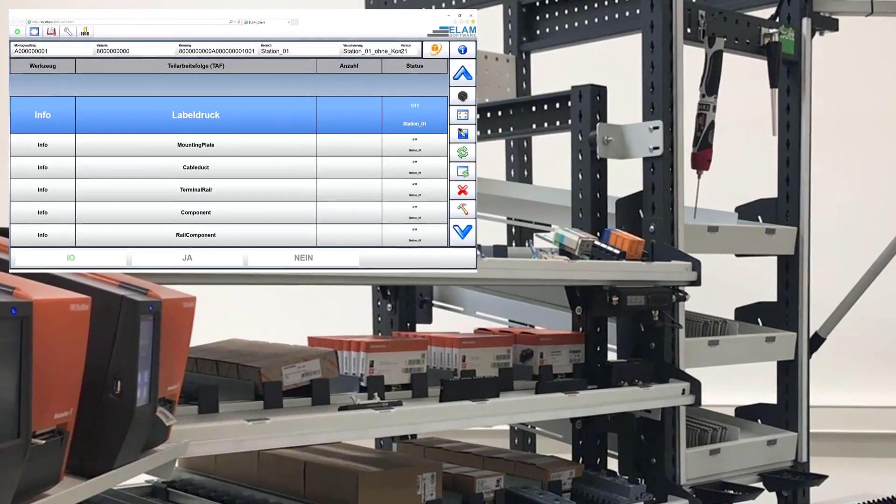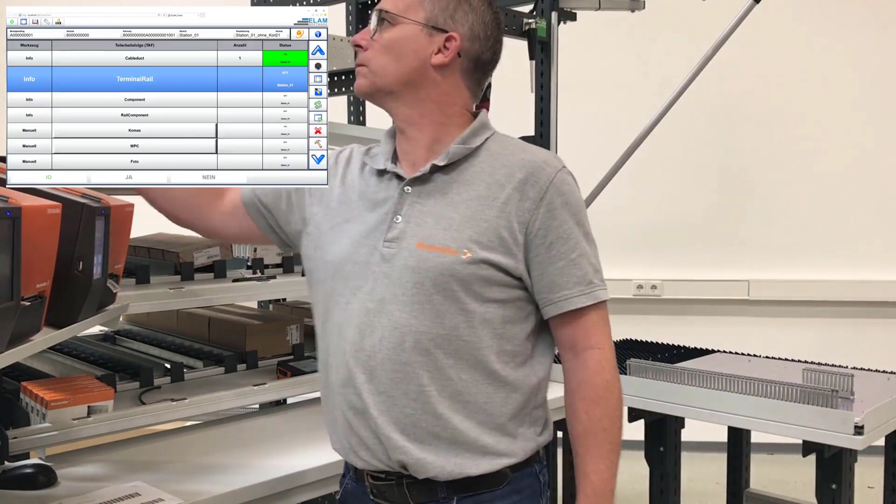Okay, so now the order number is scanned and the working instruction is shown. Again, this is fully dynamically generated, nothing prepared beforehand. Here we go step by step through all the assembly parts, projecting them directly onto the mounting plate for the terminal rail assembly, and also supporting the worker with a pick-to-light system so he knows exactly what part is next and where to take it out. With the projection, he can see where to put the part back and where to assemble it.

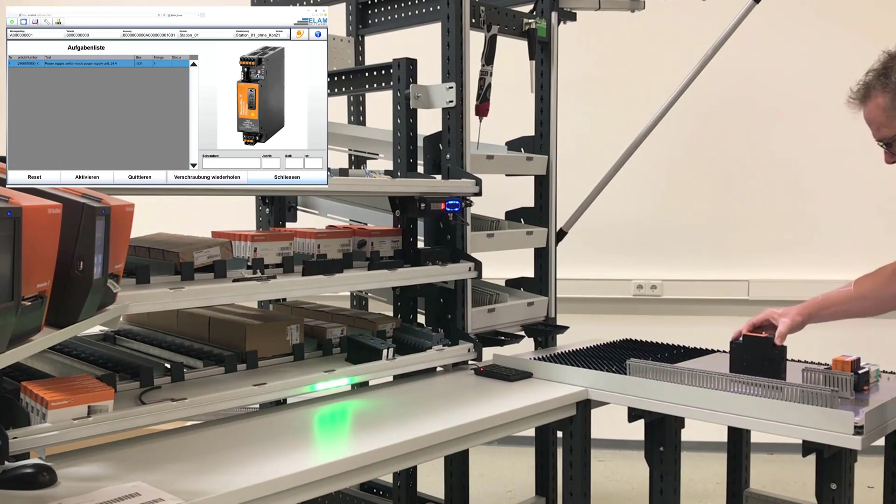This goes through the whole working process, step by step. The worker gets dynamically generated working instructions, and at the end we also take a picture of the product for documentation. Basically that's it for the mounting plate. As you can see, it's similar to the terminal rail assembly, but this time it's for the mounting plate.